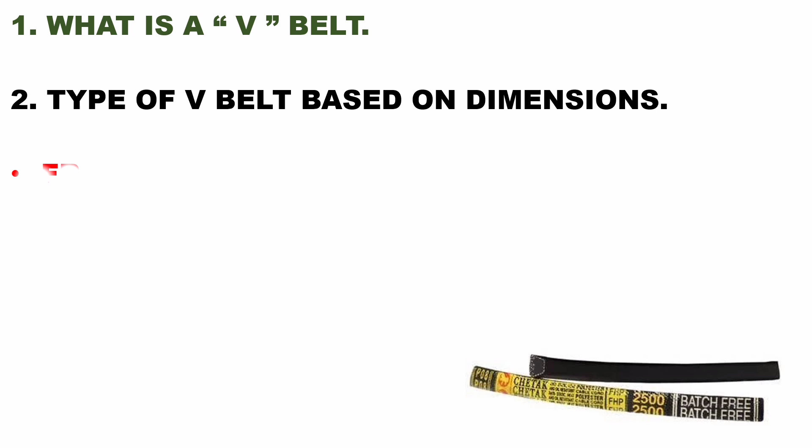Today we will understand the following topics: what is a V-belt, the types of V-belt based on dimensions, the fractional horsepower (FHP) V-belts and its types 2L, 3L, 4L, 5L, and how to calculate 2L, 3L, 4L and 5L belt sizes. In the upcoming slides we will discuss the details thoroughly.

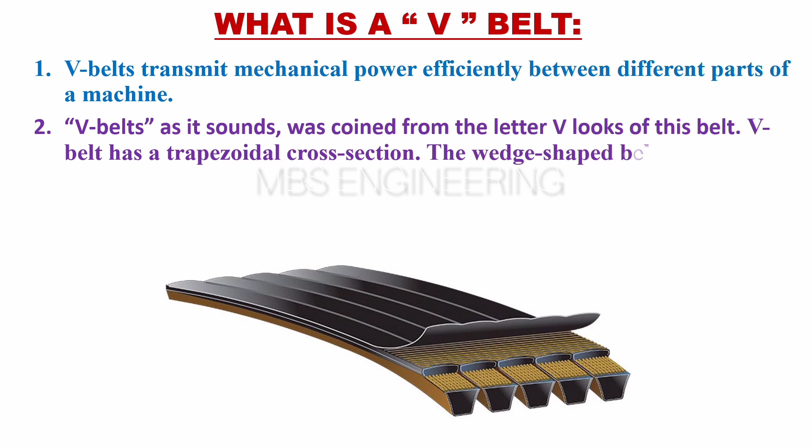Now we will learn what is a V-belt. V-belts transmit mechanical power efficiently between different parts of a machine. The name V-belt was coined from the V-shaped look of the belt. It has a trapezoidal cross-section, and this wedge-shaped belt fits perfectly into the wedged groove of a pulley. The V-belt is flexible and transmits power from one shaft to another.

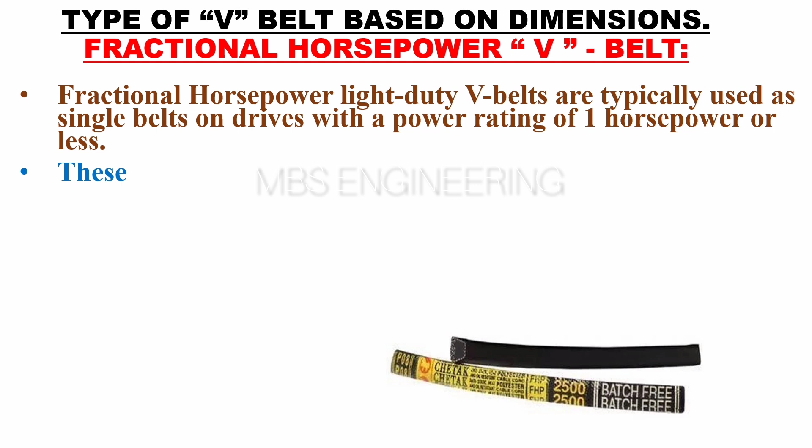Now we will learn about the type of V-belt based on dimensions, starting with the fractional horsepower V-belt. Fractional horsepower light-duty V-belts are typically used as single belts on drives with a power rating of 1 horsepower or less. These belts are designed to handle relatively light loads. Common applications include domestic washing machines, small fans, refrigerators, and garage equipment. The common designations for fractional horsepower V-belts are 2L, 3L, 4L, and 5L.

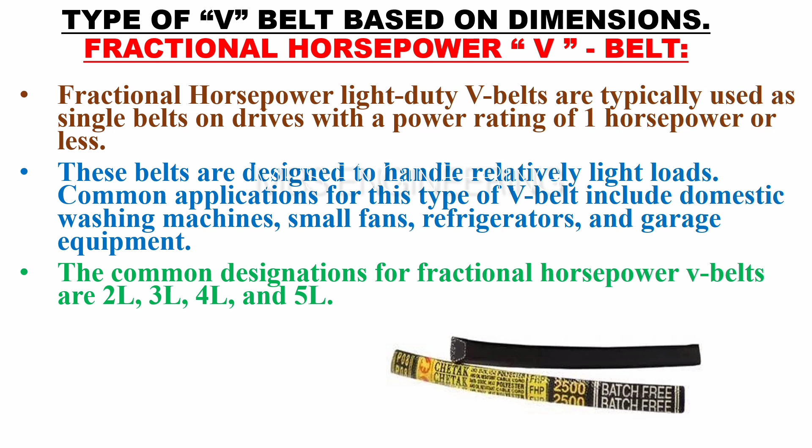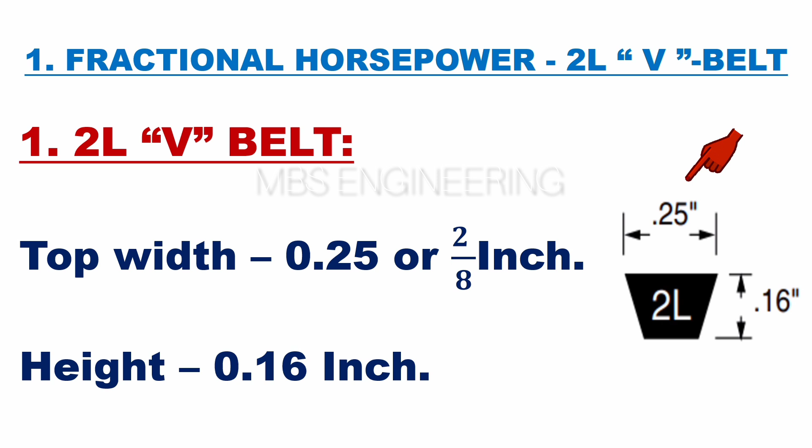Now we will learn about the fractional horsepower V-belt's first type, the 2L V-belt. The top width of the 2L V-belt is 0.25 inch, or 2/8 inch, and the height is 0.16 inch. Please refer to the figure illustrating the 2L V-belt for a better understanding.

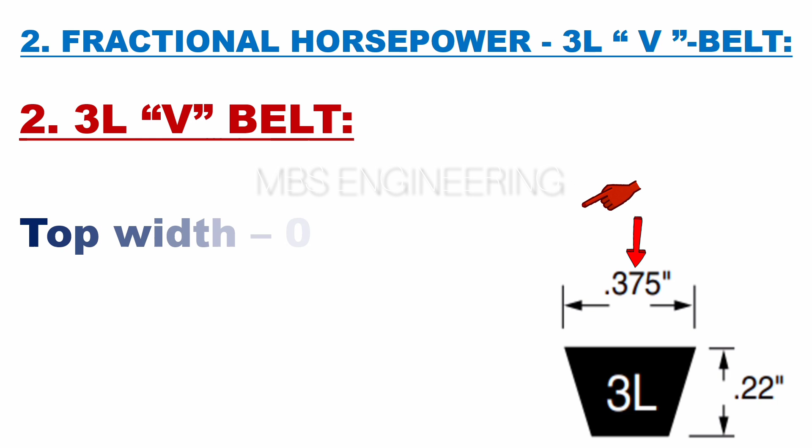Now we will learn about the fractional horsepower V-belt's second type, the 3L V-belt. The top width of the 3L V-belt is 0.375 inch, or 3/8 inch, and the height is 0.22 inch. Please refer to the figure illustrating the 3L V-belt for a better understanding.

Now we will learn about the fractional horsepower V-belt's third type, the 4L V-belt. The top width of the 4L V-belt is 0.5 inch, or 4/8 inch, and the height is 0.31 inch. Please refer to the figure illustrating the 4L V-belt for a better understanding.

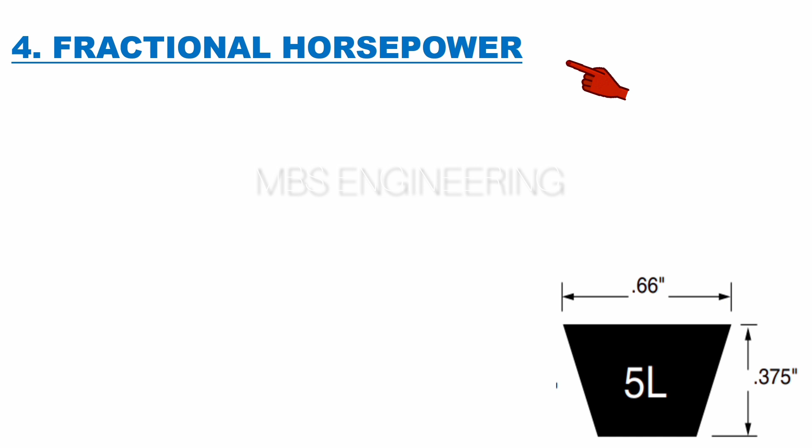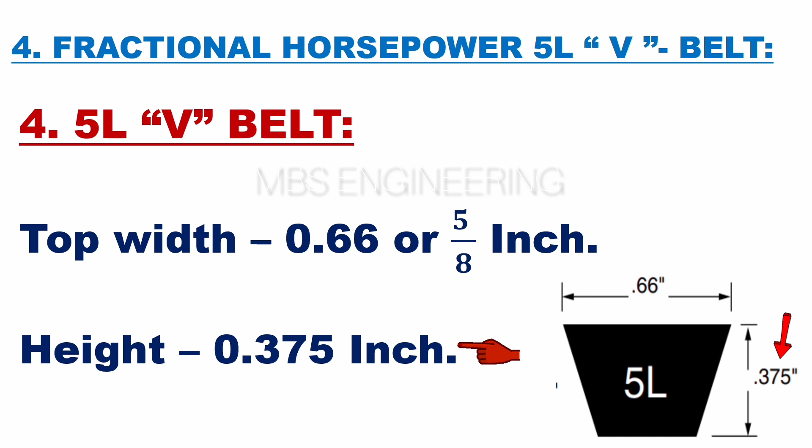Now we will learn about the fractional horsepower V-belt's fourth type, the 5L V-belt. The top width of the 5L V-belt is 0.66 inch, or 5/8 inch, and the height is 0.375 inch. Please refer to the figure illustrating the 5L V-belt for a better understanding.

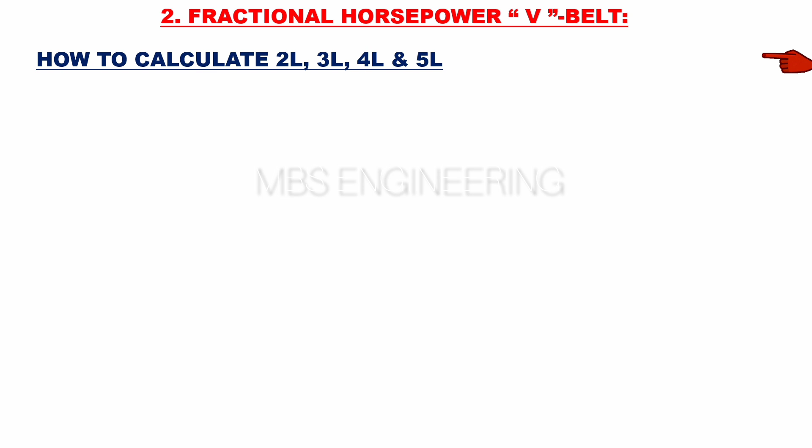Now we will learn how to calculate fractional horsepower 2L, 3L, 4L and 5L V-belt sizes, specifically how to calculate the top width of the belts. The number before the L denotes the top width of the belt multiplied by 1/8 of an inch, or 3.2 millimeters. For 2L V-belts, 2 times 1/8 gives a top width of 2/8 inch.

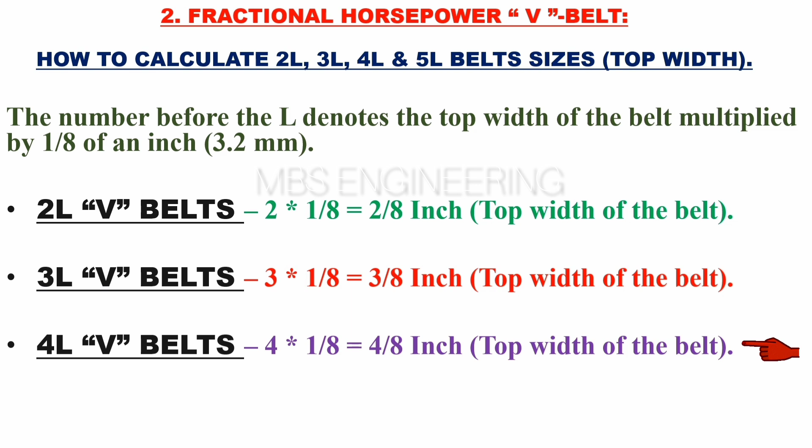For 3L V-belts, 3 times 1/8 gives a top width of 3/8 inch. For 4L V-belts, 4 times 1/8 gives a top width of 4/8 inch. For 5L V-belts, 5 times 1/8 gives a top width of 5/8 inch.

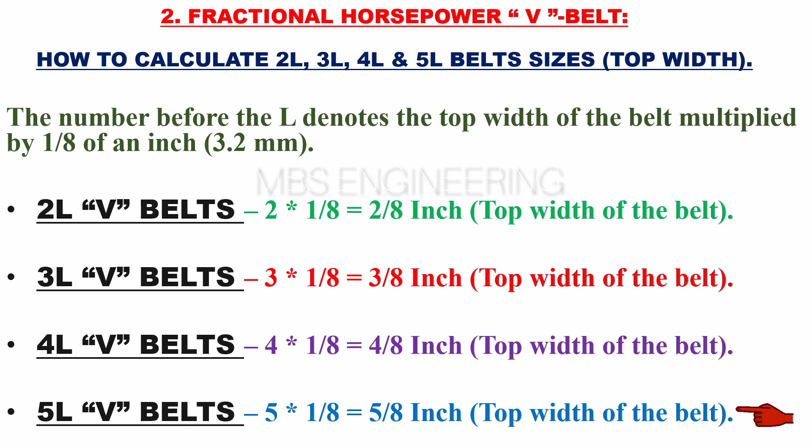Now we will learn how to calculate fractional horsepower 2L, 3L, 4L and 5L belt sizes, specifically the inside and outside length of the belts. The numerical prefix indicates the belt top width in 1/8 of an inch, followed by the nominal outside length in tenths of an inch. Let's go through an example.

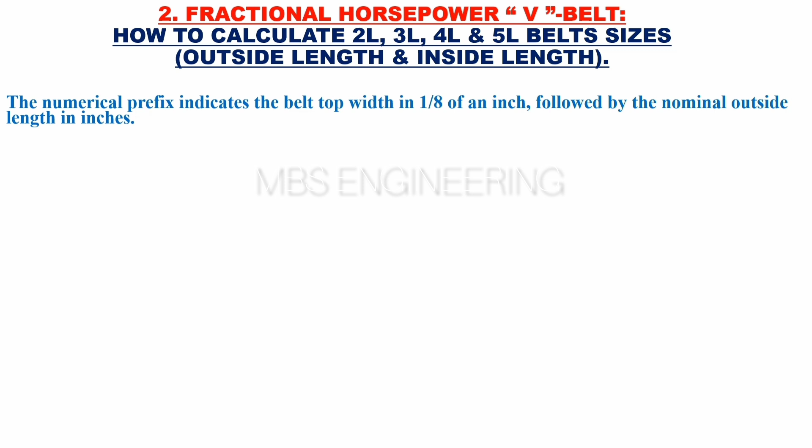To calculate the outer length of the belts, the 3L300 part number indicates a 3/8 top width with a 30-inch outer length. To get the outer length, 300 divided by 10 gives the 30-inch outer length of the belt. Now let's look at another example.

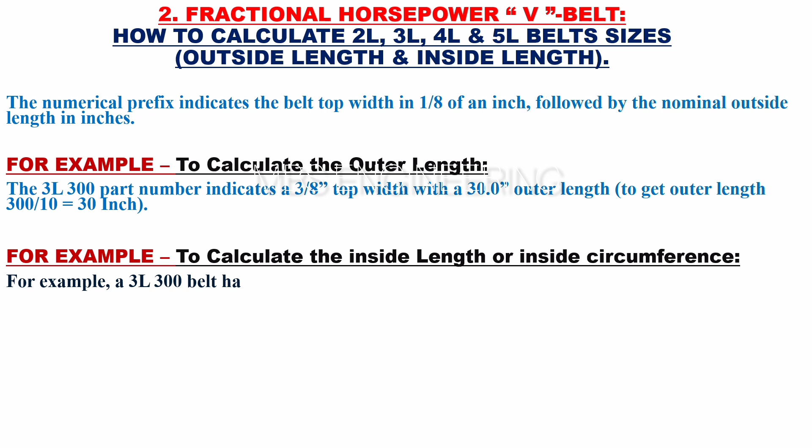To calculate the inside length of the belts, or inside circumference: for example, a 3L300 V-belt has an inside circumference (IC) of 28.5 inches. To calculate the inside circumference of a 3L V-belt, subtract 1.5 inches from the outside circumference (OC). That means 30 minus 1.5 gives an inside length of 28.5 inches.

Here are some other belt size calculations. For a 2L V-belt, subtract 1 inch from the outside circumference. For a 4L V-belt, subtract 2 inches from the outside circumference. For a 5L V-belt, subtract 3 inches from the outside circumference.

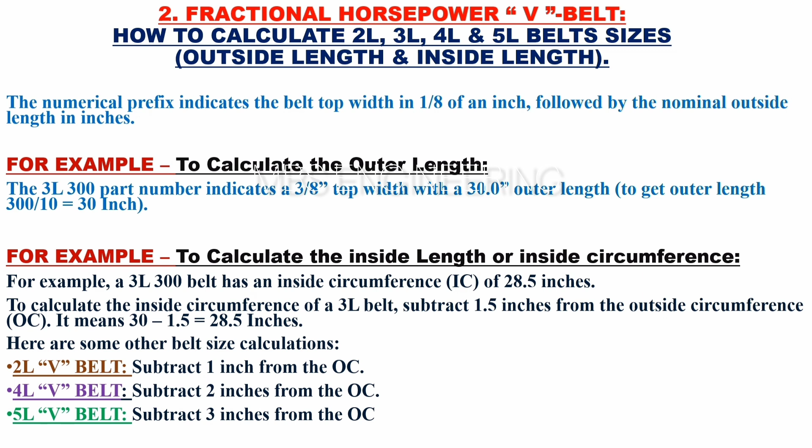Now we will learn how to calculate fractional horsepower 2L, 3L, 4L and 5L V-belt sizes overall, understanding belt top width, inside length, and outside length. Let's consider the example of a 3L150 part number belt. 150 is the nominal number associated with the belt. The effective outside length is calculated as 150 divided by 10, which equals 15 inches. The effective inside length is found by subtracting 1.5 inches from the effective outside length, resulting in an effective inside length of 13.5 inches.

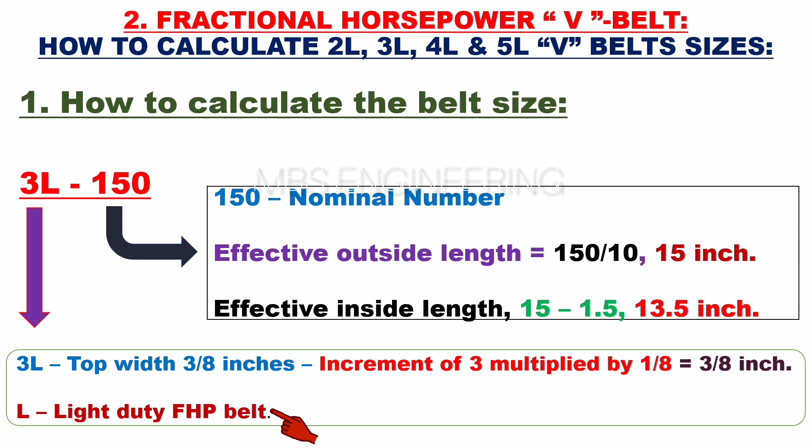The '3L' indicates a top width of 3/8 of an inch, where the increment of 3 is multiplied by 1/8, resulting in a width of 3/8 inch. The 'L' signifies that it is a light-duty FHP, or fractional horsepower, belt.

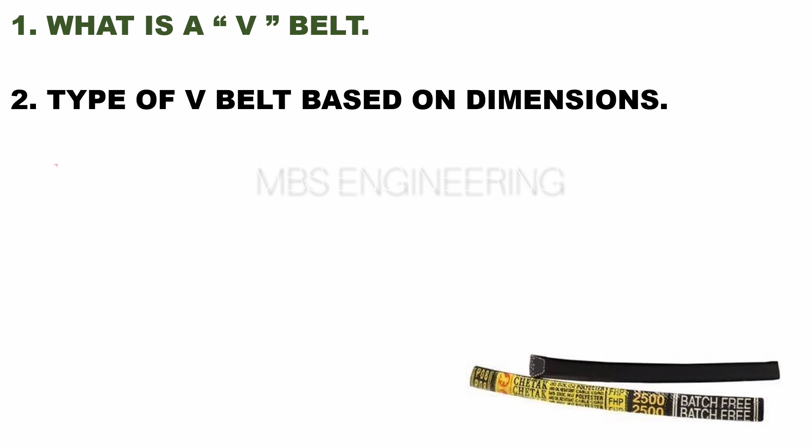We hope everyone understands what a V-belt is, and understands the fractional horsepower V-belt and its types - 2L, 3L, 4L and 5L - and understands the calculation of belt sizes for 2L, 3L, 4L and 5L V-belts.